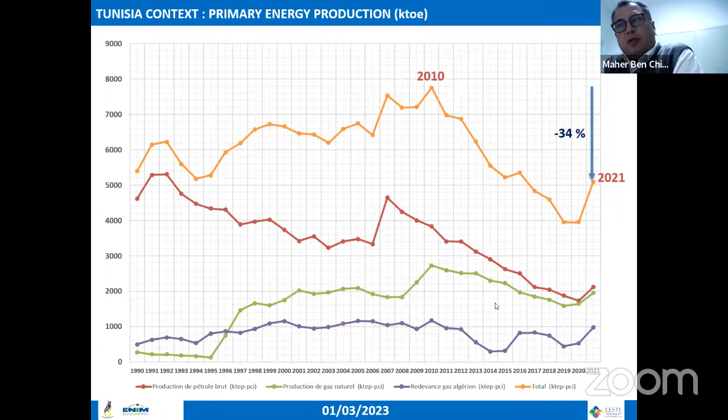So let's start with this Tunisian context. This first chart gives an idea about the primary energy resources in the last 3 decades. One can observe that oil production has been going down since 2010, and the domestic production of natural gas in green plot has stagnated. I have to mention here that Tunisia receives royalties on the gas that is pumped through a pipeline running through Tunisia, connecting Algeria gas fields to Italy.

According to the National Energy Observatory, the total final energy consumption reached in 2021 is about 9,700 kiloton oil equivalent. Oil products accounted for around 53%, followed by natural gas at about 18%.

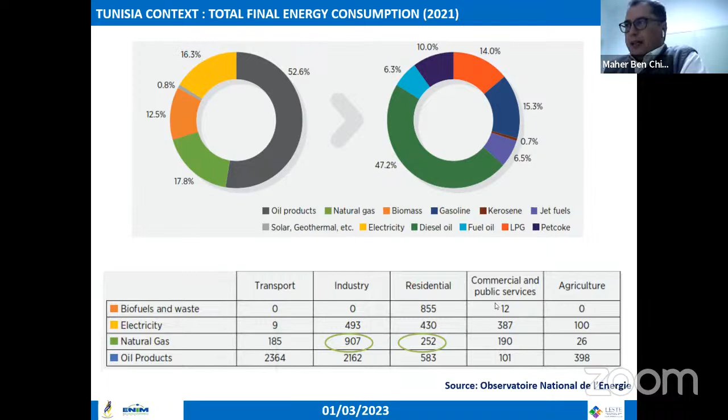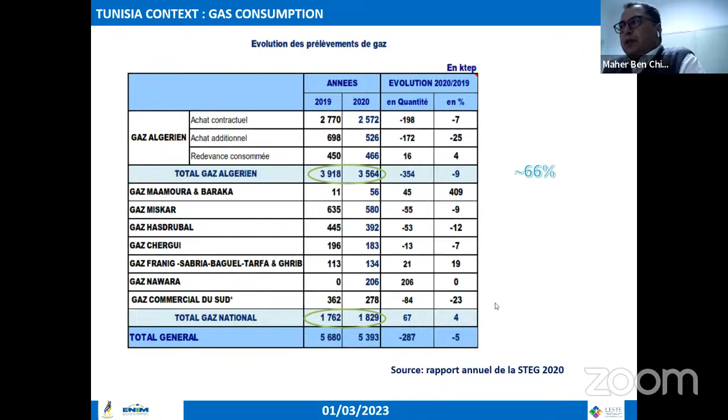Natural gas is consumed in Tunisia mainly in industry and the residential sector, and this gas is essentially imported from Algeria with a percentage of 66%. This share represents a great handicap for the national energy balance, despite the recent entry into service of many other national fields, such as Nawara gas field. So the Algerian gas is mainly distributed in the north of Tunisia, and it is mixed with national gas and distributed in the south.

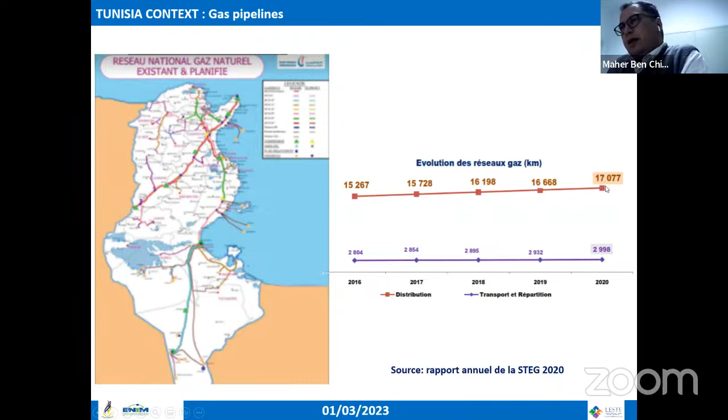The country of Tunisia has a large distribution network that covers most large cities and industrial areas. STEG reports of 2020 indicate that the network infrastructure continues to grow, and the transport and distribution gas grid size reached 3,000 kilometers and 17,000 kilometers respectively.

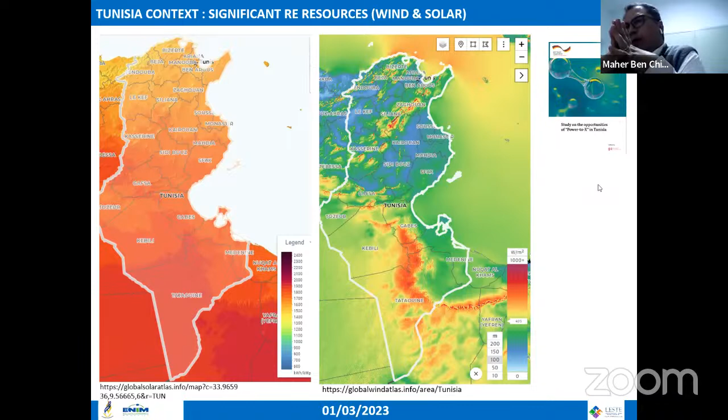On the other hand, Tunisia may account on its huge renewable resource in photovoltaic and wind resources. When we look to this map, we can appreciate the treasure that is available in Tunisia. When we evaluate this potential, we can see that Tunisia has a potential that is greater than the mean value in the world for both solar and wind potential.

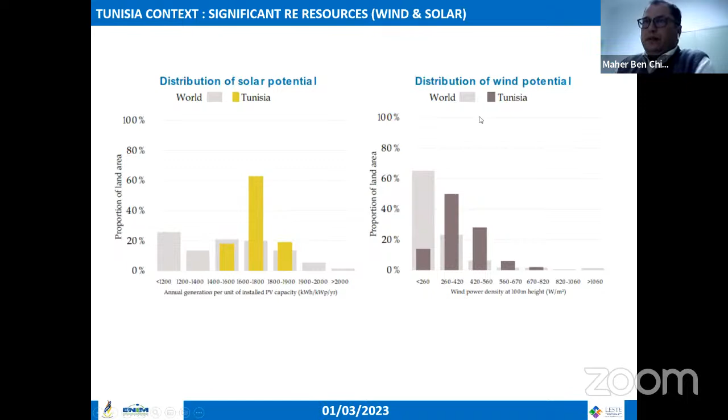Recently, Tunisia has set ambitious renewable energy targets in its solar plan. This solar plan expects a share of 35% by 2030. And here we need further power flexibility measures to integrate these capacities. This can be done by converting electricity into hydrogen to increase the flexibility of the power system.

And also using this hydrogen, or injecting this hydrogen in natural gas pipes, this can address many problems such as the large-scale application and transmission problems associated with using hydrogen as an energy source. Using the grid, you can ensure transmission and distribution of hydrogen, and you can reduce the energy balance deficit of Tunisia.

So this offers many advantages. I can mention here the ability to transport a large amount of energy with very little loss, decoupling supply and demand, enhancing sector coupling, enhancing storage capacities, and offering the possibility of re-electrification. All this can ensure a successful and efficient energy transition of our country.

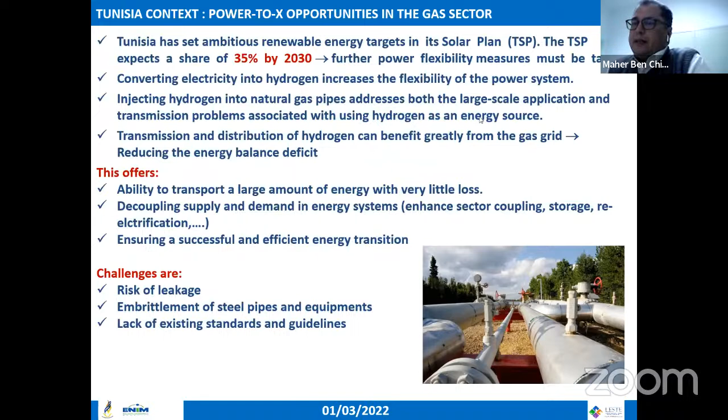For hydrogen blending requirements, I have to mention that hydrogen has the following characteristics: a significantly higher flame speed, less energy on a volumetric basis, greater flammability and explosive range, and hydrogen burns at a higher temperature than natural gas. So the addition of hydrogen can also affect the accuracy of metering, appliance material integrity, and the operation of appliance equipment.

An increased hydrogen concentration has the potential to result in undesirable combustion characteristics such as flashback, higher NOx emissions, the potential of uncontrolled reignition of unburned gas remote from the burner injector, and also the risk of hazards on appliance design.

So it is necessary to understand how adding hydrogen to natural gas might affect consumer appliances in order to determine if injecting hydrogen into distribution networks is feasible. We try to know how various pipe network types affect the variation in calorific value of natural gas after hydrogen mixing, and evaluate the proportion and quality requirements for hydrogen mixed gas in natural gas pipelines.

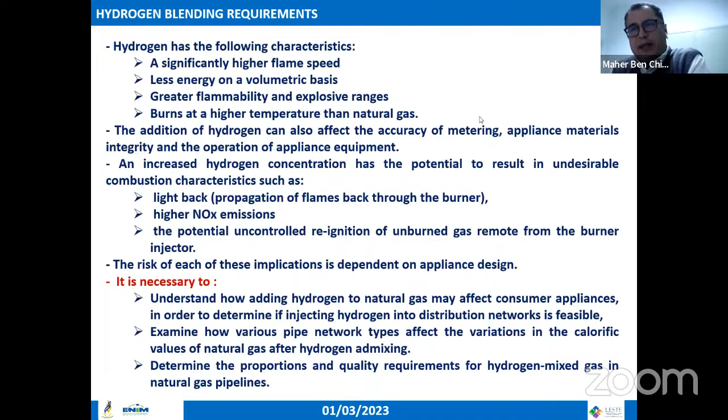When we speak about this, we need to define interchangeability. Interchangeability is the ability of a combustible gas to be replaced by another without requiring the adjustment of other gas devices or equipment, changing the mode of operation, or changing the setting of such equipment. The units will continue to function safely and effectively.

It is not new. The matters of interchangeability of combustible gases are not new. It was addressed by Knoy in 1941 and 1953, where he established the theory and practice of fuel consumption. It was addressed by Gilbert and Prigg in 1956 in his publication on the issue of transition from synthetic gases to natural gas, and recently by Jones when he discussed the mix of biogas, refinery gas, and liquefied natural gas with each other and air.

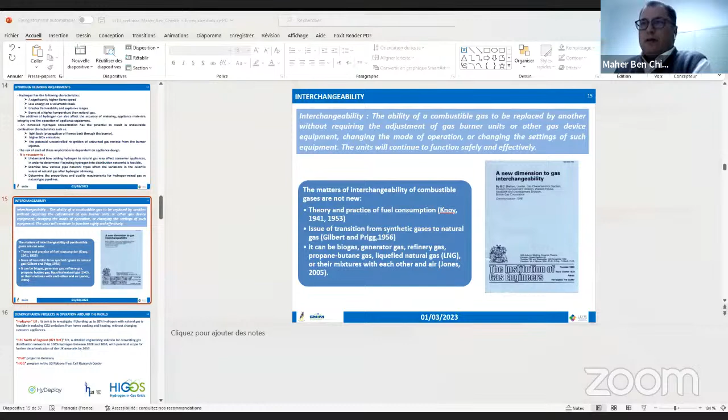Around the world, there are many demonstration projects in this direction. I can mention some of them: HyDeploy in United Kingdom, and others in United Kingdom, Germany, and the US.

To study the interchangeability, we have to look at the physical and chemical characteristics of natural gas. I'll mention some of them: maximum higher heating value, minimum and maximum Wobbe index, maximum inertness, maximum carbon dioxide, maximum nitrogen, maximum and minimum specific gravity, and maximum and minimum gas density. We also have to look at combustion parameters: methane number, flame speed factor, and the Sooting index.

The physical and chemical characteristics of natural gas provide a range of gas composition, ensuring connected appliances operate safely, and the combustion parameters are used to specify a particular gas composition. When we look at previous studies, we can identify that adding hydrogen to natural gas will alter gas composition, which in turn impacts the mentioned physical and combustion parameters.

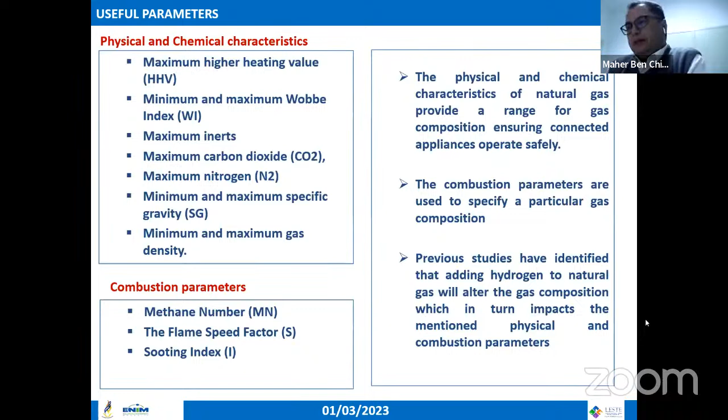Two main parameters have to be discussed here. The first is the higher heating value. It represents the energy content in a volume of gas when completely burned in air at standard conditions. It's key to the commercial valuation of natural gas as it refers to the energy value of the gas. A higher flow rate would be needed to achieve the same energy throughput with a lower higher-heating-value gas composition.

The effectiveness of gas appliances like burners and cookers is impacted by low higher heating value and low gas density. The second main parameter is the Wobbe index. It measures the heat rate at the burner. This parameter is used to estimate the interchangeability of various gases, but it's still a global indicator. The performance of a burner should be the same for different gases with the same Wobbe index.

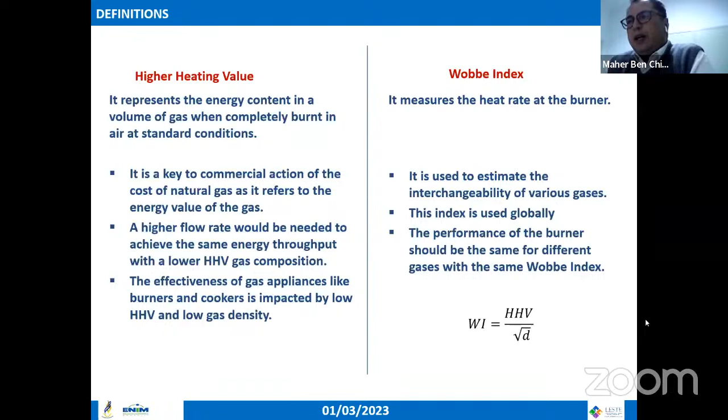The Wobbe index is linked to the higher heating value by this relation: Wobbe index equals higher heating value divided by the square root of mean gas density.

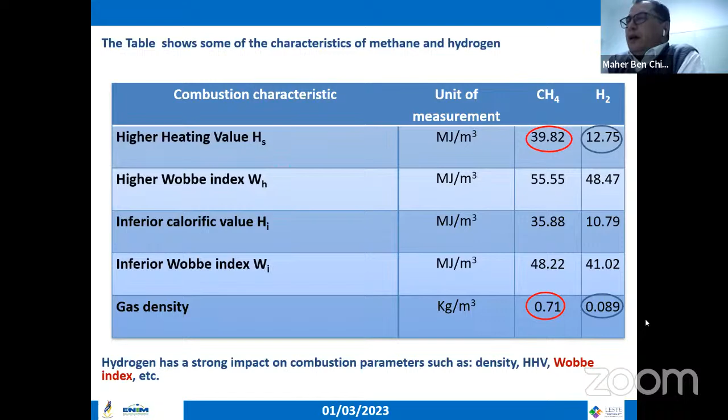This table shows some characteristics of methane and hydrogen, and hydrogen in natural gas, which has a high percentage of methane. We can see that hydrogen has a strong impact on combustion parameters such as density, higher heating value, and Wobbe index, because these combustion characteristics of hydrogen are lower than those of methane.

For this study, we used a gas test. We used Algerian gas as the gas test. Here I give the mean composition of the natural gas from Algeria.

When we look at standards, we can classify natural gas by family, then by group, then by subgroup. Natural gas are in family 2. Methane gases are in group E. The same group has the same combustion characteristics and are clustered by the value of one of the interchangeability indicators: the Wobbe index, the superior calorific value or higher heating value, and the combustion potential.

Here we plot higher heating value versus different ratios of injected hydrogen in natural gas. We can see the higher heating value decreases linearly versus hydrogen injected. But when we look at the Wobbe index, we see it decreases until 80%.

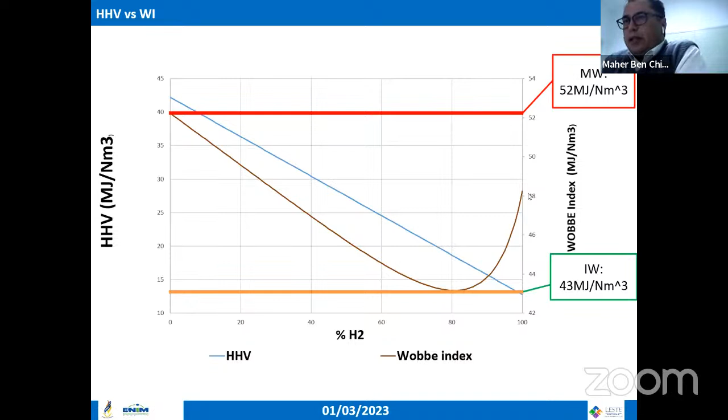It seems as if you're, at least I am, quiet here. I don't know about my colleagues. Cannot hear you anymore. We lost him. Can you hear them, Alex? No, I can't. We cannot hear you, Professor Benchik. You're quiet.

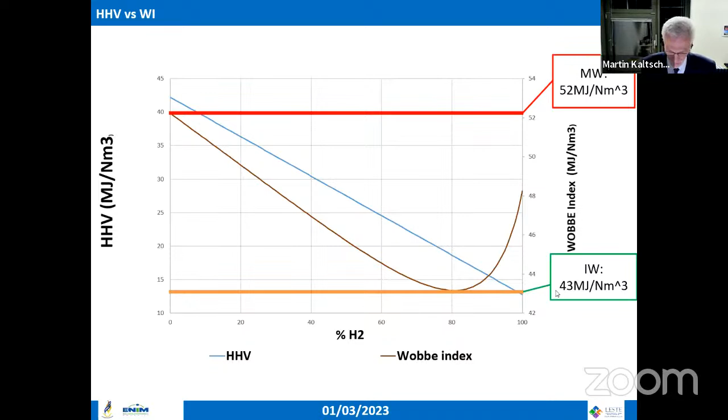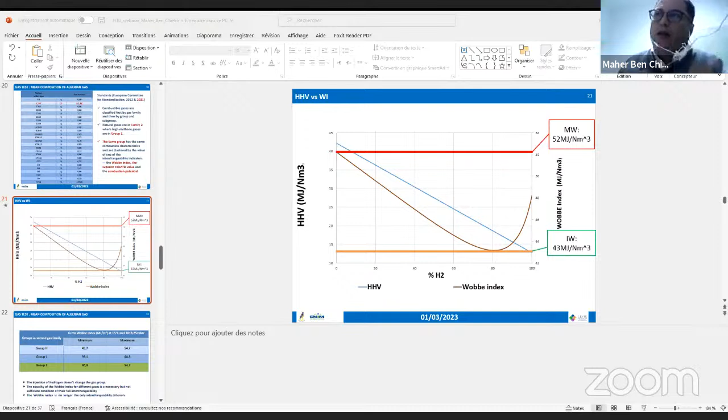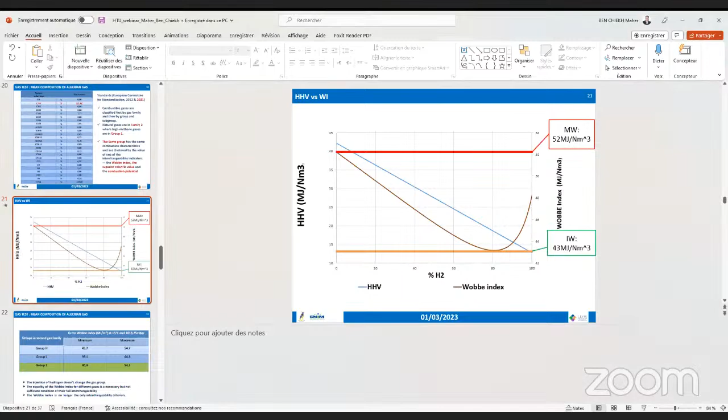Is it okay for me now? Yes, thank you. I have to switch this camera. Okay. Is it okay for this slide? Do you hear me in this? We can hear you, the slide is fine, but we don't have your video. You're black, so to say. Ah, okay.

So in this slide, I said that we will use in this study the mean composition of Algerian gas as a gas test. This Algerian gas is characterized by a high percentage of methane.

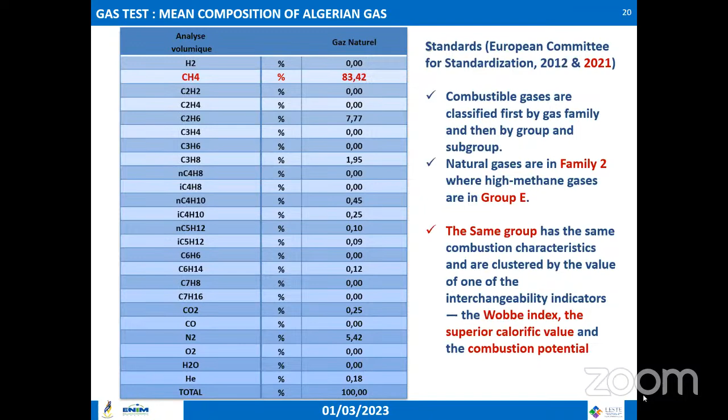When we look at standards, combustible gases are classified first by gas family, then by group and subgroup. Natural gas are in family 2, where high methane gases are in group E. The same group has the same combustion characteristic and are clustered by the value of one of the interchangeability indicators: the Wobbe index, the superior calorific value or higher heating value, and the combustion potential.

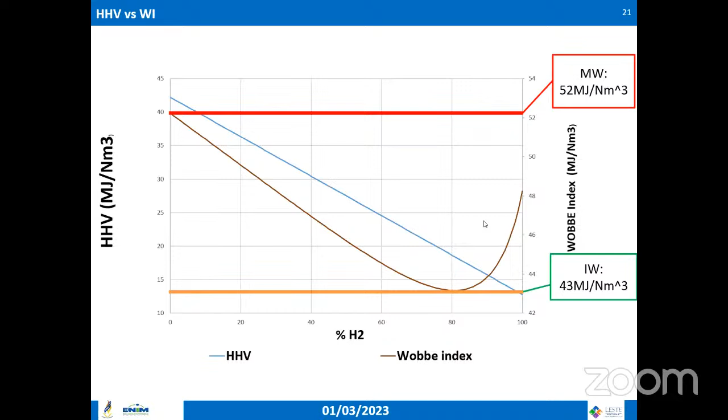When we plot the higher heating value versus hydrogen percentage, one can observe that this higher heating value decreases linearly versus hydrogen percentage, and the Wobbe index decreases until 80% before climbing back again. The main result here is that the Wobbe index varies between 43 and 52 megajoules per normal cubic meter, and it's still inside the range allowed by group E, reserved for high methane gas. The injection of hydrogen here doesn't change the gas group.

We have to mention here that equality of Wobbe index for different gases is necessary, but not sufficient, for their full interchangeability. The Wobbe index is no longer the only interchangeability criterion.

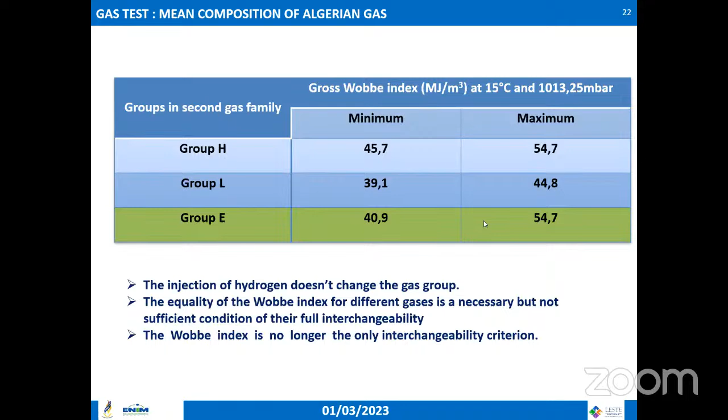To improve the viability of the study, we must consider the combustion parameters.

When we look at the combustion diagram here, starting with this green point, the injection of hydrogen reduces the heat output, and the final operating point may remain in region 5, dedicated to steady and efficient gas combustion, or move into region 1, called the light-back region, or move to region 3, the yellow-tipping region, which is a soot region.

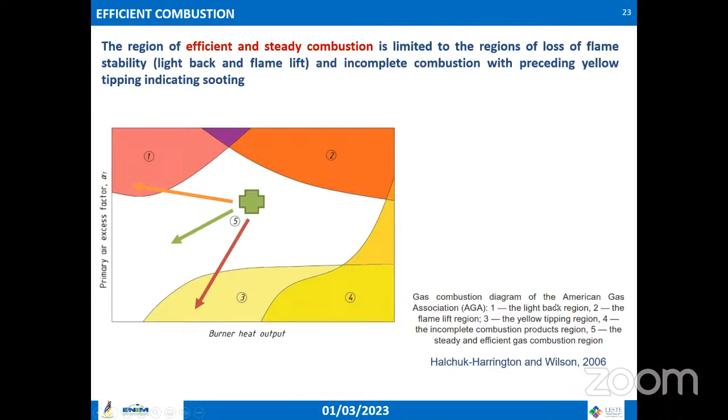To perform a deep study of the impact of hydrogen on combustion parameters, we can use one of these advanced methods.

In this work, we tested 3 methods: the one highlighted in red, the Dutton criteria, the Delbourg method, and the Knoy factor. In each method, specific parameters are evaluated. Let's start with the Dutton approach.

This approach consists of simplifying the gas composition by converting it to an equivalent mixture of methane, propane, nitrogen, and hydrogen. All hydrocarbons are replaced with an equivalent amount of methane and propane, and nitrogen is adjusted to preserve the Wobbe index of the original gas mixture.

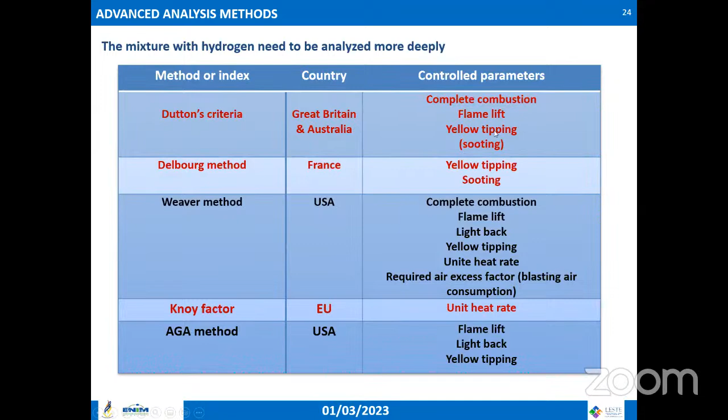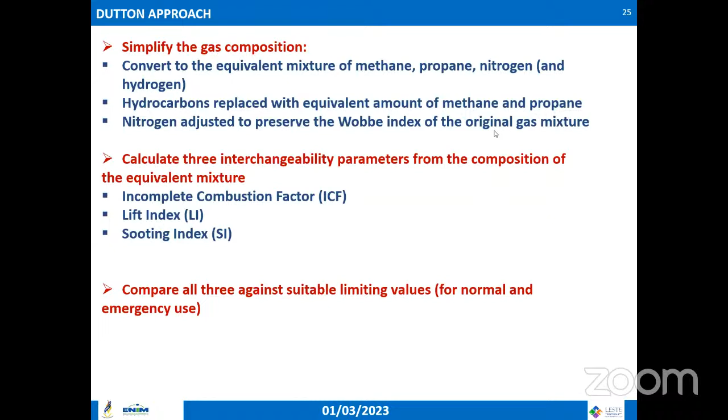The second step was to calculate 3 interchangeability parameters: the incomplete combustion indicator, the flame lift index, and the yellow-tipping or sooting index. The last step was to compare all these 3 parameters against suitable limiting values.

This method is used in the UK, and regulation in Great Britain stipulates that this indicator must be less than 0.48 to prevent incomplete gas combustion.

The second parameter is the lift index. It is an empirical parameter developed and used by Dutton to predict flame lift, when the characteristic flame velocity becomes lower than the characteristic flow velocity. This parameter is defined by this equation.

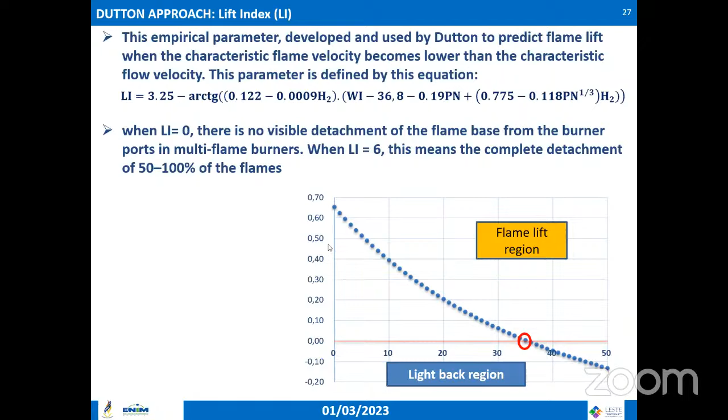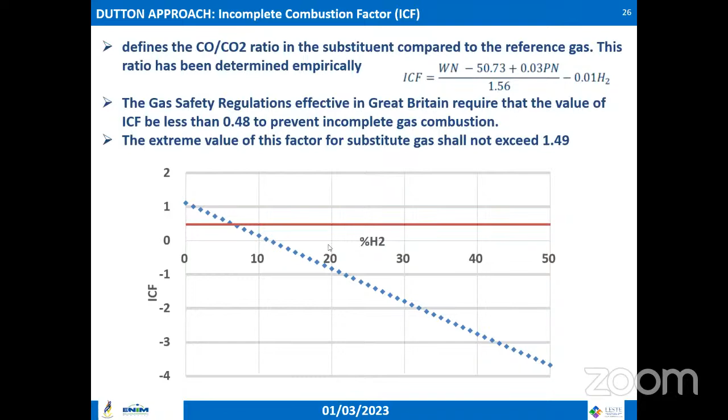So to summarize, we can see that only for the first parameter is there a slight limitation on hydrogen injection into natural gas.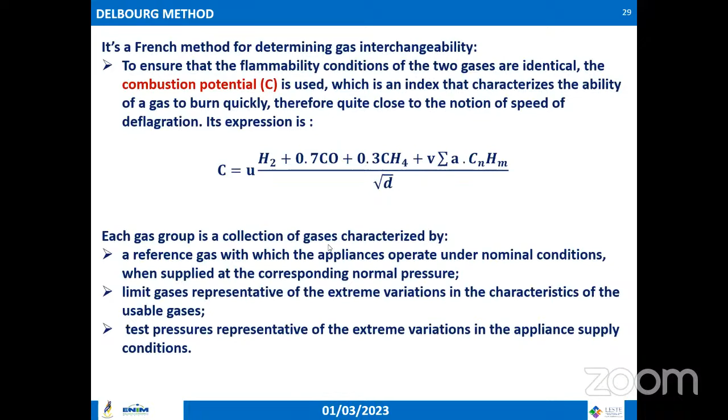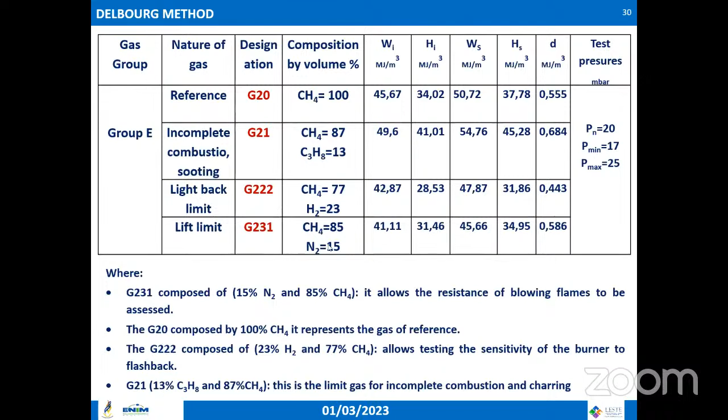This French method developed some reference gases, given in this table and designated G20, G21, G222, and G231. For these reference gases, there are specifications for each one, given below.

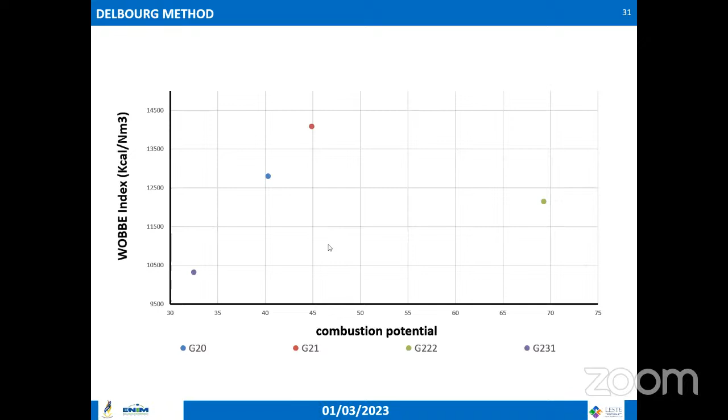When we plot these references on a Wobbe index versus combustion potential plot, we can delimit the region of this reference gas, and we integrate our results on this plot.

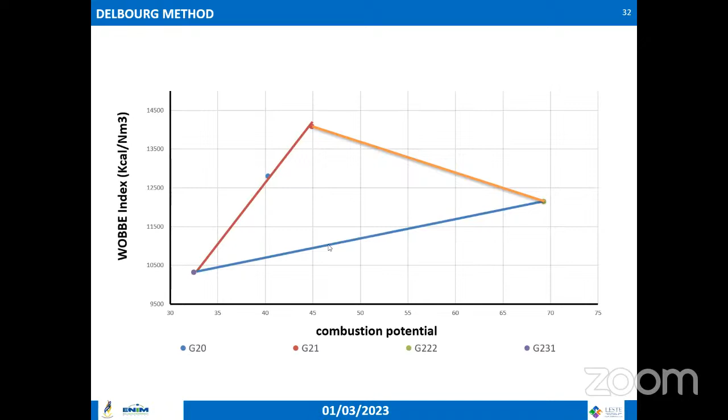We can see that when we add hydrogen to natural gas, we reach a limit of 20%, and after this limit we are outside the diagram limit. So the maximum rate allowed by this technique was 20%, to remain inside the interchangeability diagram.

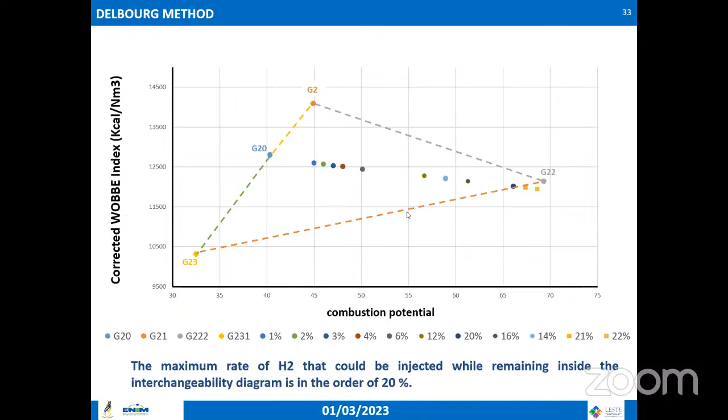The third method tested here is the Knoy factor, given by this relation. When we plot this factor versus hydrogen injected into natural gas, we can see that within a variation of less than 5% tolerated by this method, we can inject up to 20% hydrogen.

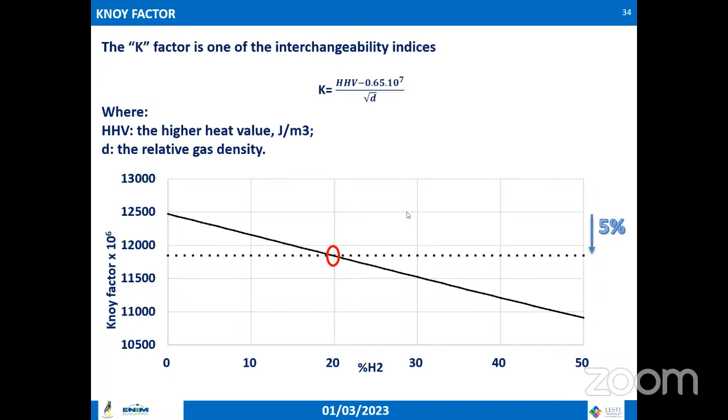So according to this study, natural gas and natural gas enriched with hydrogen are interchangeable for well-defined proportions. A hydrogen content up to 20% is possible using the two last methods, method 2 and method 3. A deeper analysis considering the economic impact of this large-scale alternative must be performed.

Also, studies on other national gas fields, Miskar and Nawara, are in progress. I have to mention that the gas sector in Tunisia is governed by two main laws dated 1999 and 1964, and the production of hydrogen as an energy product is not covered by any existing provision under gas legislation. For any future development of green hydrogen activity, new regulation would have to be developed.

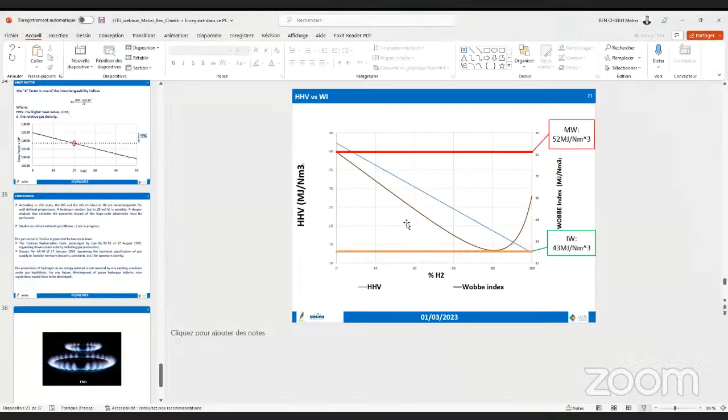Yeah, Professor Ben Cheikh, thank you very much for this very nice presentation. Sorry, well, you know, things happen, but then we figured out that the battery of your headphone had expired, so from that point on it worked out quite nicely.

Thank you very much for this very interesting presentation about the interchangeability of hydrogen injection in gas pipelines. This is also a topic which is very much discussed here in Germany. Some of the local gas providers or gas transportation companies claim that they can use 100% hydrogen, so they claim to already be hydrogen-ready for transportation.

Others say, well, we can only use 10%, 20% or something like this. So this is a very ongoing discussion here in Germany at the moment. Most likely we will also get some problems with the end user, because as you outlined, if the end user gets a different gas quality and has a sensitive end-use facility or end-use apparatus or system, that might also create a challenge.

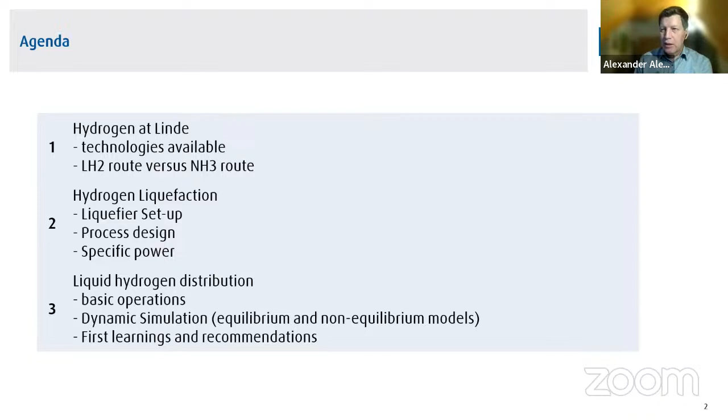That's about Linde. Linde is a large industrial gas company, really great, 80,000 employees representing 100 countries. Linde is a member of the Dow Jones Sustainability Index, and we're proud of it. But I think more interesting is our hydrogen footprint, and the most important information: we are one of the biggest producers of hydrogen. We own and operate 150 plus hydrogen plants, producing more than 8,000 tons per day of hydrogen.

That is unfortunately mainly gray or black hydrogen, but we are now going to be greener and greener. We have already installed roughly 80 electrolyzers with a total capacity of 40 megawatts. This number is from 2021, I think. In 2022 we doubled our capacity, and I think in the next years we will even increase the production of green hydrogen.

What's interesting, we have a huge hydrogen pipeline network. The total length is more than 1,000 kilometers, mainly in the USA, in the Gulf Coast. But in Germany, in Leuna, close to Leipzig, we created a huge hydrogen pipeline network with compressor stations, and we have one cavern in the USA, one of the biggest hydrogen caverns for storing, mainly for backup purposes in the USA.

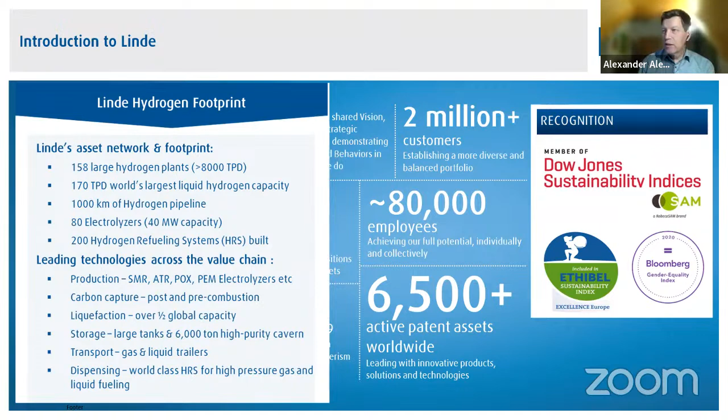Good. The next slide, in principle, is the same, therefore we can skip it.

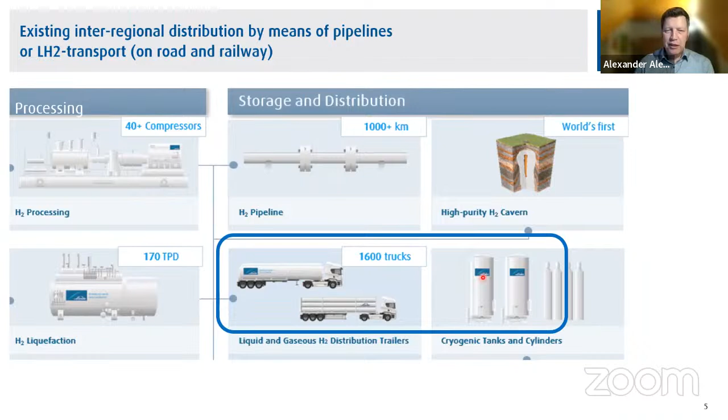The next part is a bit more information about the two technologies for transportation of hydrogen now. That's mainly by pipelines, as I said, in the upper part, and we use the pipelines and then caverns for the liquid. There are liquefiers shown, some trucks, cryogenic tanks and cylinders, and the numbers. What's interesting here is that Linde Engineering has a very interesting site. If you are interested in more information about hydrogen, you can go to this link.

One interesting technology, related to the presentation before made by my colleagues, is Linde's technology to control the hydrogen extraction from hydrogen-blended natural gas. If you inject the hydrogen into the natural gas, it's possible to remove the hydrogen from this mixture from natural gas. We use a special membrane technology based on so-called HISELECT membranes. This link is where you can find more information for this special technology. I think that's interesting because it's linked to pipeline transport.

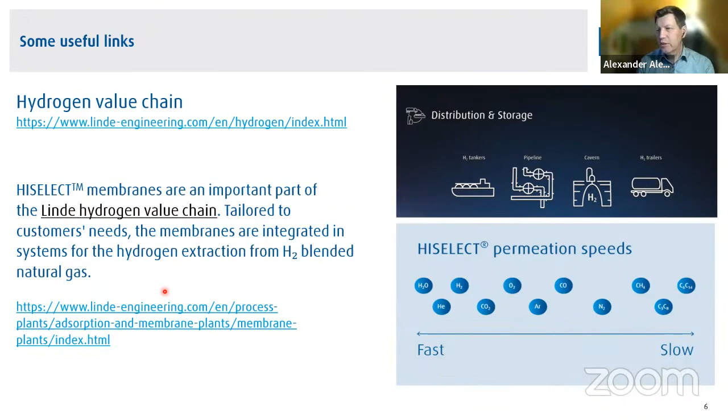What's interesting is that Linde has, of course, the whole complete liquid hydrogen supply chain, but we are also very familiar with ammonia, as Linde owns proprietary ammonia production technology. If you need ammonia, if you need a really mega-size plant, you usually go to Kellogg Brown & Root, to ThyssenKrupp, or to Haldor Topsoe.

But if you need a medium-sized plant, it's still huge, but not so mega scale. In this case Linde provides ammonia technology, and our customers like Yara are very happy. This technology is interesting - they use not air directly but nitrogen for synthesis. They use an air separation plant to separate air into nitrogen and oxygen, and only nitrogen goes into synthesis. That looks more like the future green ammonia production plant, based on a reactor using nitrogen and hydrogen. We are very familiar with this technology.

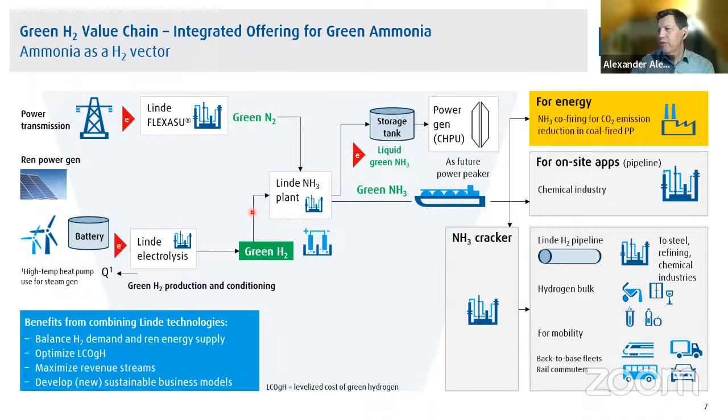Now the slide is about interesting discussions happening worldwide on how to transport hydrogen from one side to the other, and discussions are focused on two kinds of technology. One technology is based on liquid hydrogen. You produce the hydrogen, green or blue, you liquefy it, store it on the export terminal site, then load the ships, ships go to the import terminal. At the import terminal, you can vaporize the hydrogen and put it into the pipeline grid, or you can use the liquid for further distribution. That's one sort of chain.

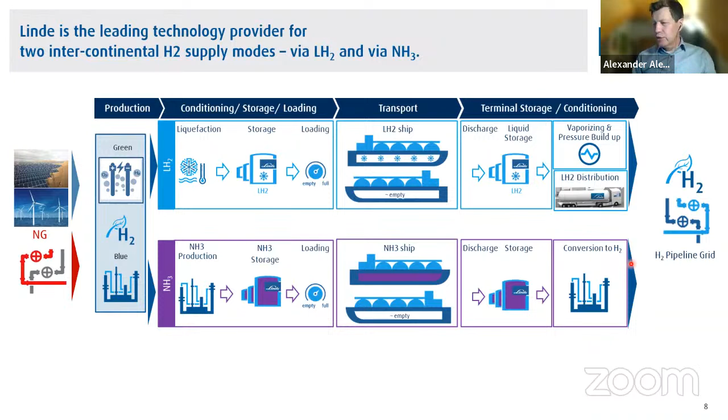The second route, now under discussion, is for ammonia production. You use green or blue hydrogen for ammonia production, and you move the ammonia by ships. At the import terminal, you need to convert the ammonia back to hydrogen and put it into the pipeline grid. There are a lot of studies comparing these technologies, and we performed one internal study, because we are familiar with both technologies, the ammonia and the liquid hydrogen routes. I'm not really willing to share all results, but one result is more about Tunisia.

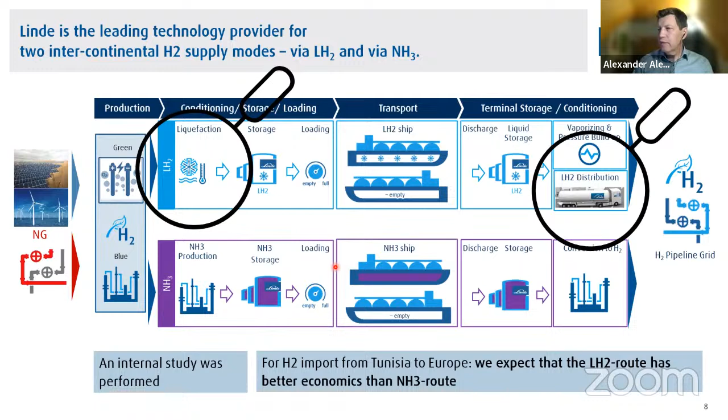For Tunisia, our study says that the liquid hydrogen route has better economics than the ammonia route. That's mainly because the distance is relatively short, and for ship transport they don't need so much fuel or hydrogen, and the boil-off gas losses are really low. Therefore, in our calculation, LH2 transport is better when we are talking about Tunisia. Good, that was the output of the study.

Now I go to the hydrogen liquefaction. With some slides I presented already last year, therefore I will try to go a bit faster.

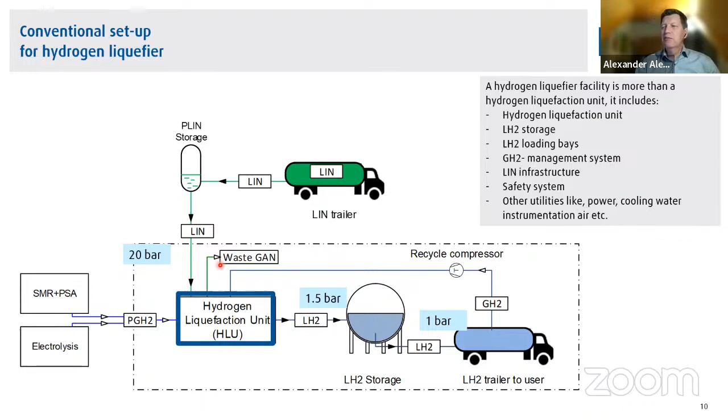What's special here? You need really cold temperatures - 20 Kelvin, which is minus 250 degrees Celsius. The critical state is at 13 bar. That's an important value because for liquefaction you need supercritical hydrogen - you need to compress hydrogen before liquefaction, over the critical pressure, and critical is 13. It means for liquefaction you need 15 or 20, better 25 or 30.

Evaporation heat is very low, like 1 kilojoule per mole. What's special in hydrogen is that during the cooling it goes through a kind of conversion - from a normal composition, ortho, to para. During this conversion, some additional heat is generated, in the same order of magnitude as evaporation heat, about 1 kilojoule per mole. That's additional heat you need to remove during the liquefaction mode - you cool it, and you need to convert it, and that value is considerably high, comparable with evaporation heat. Density in liquid condition is just 70 grams per liter - it's a very light liquid.

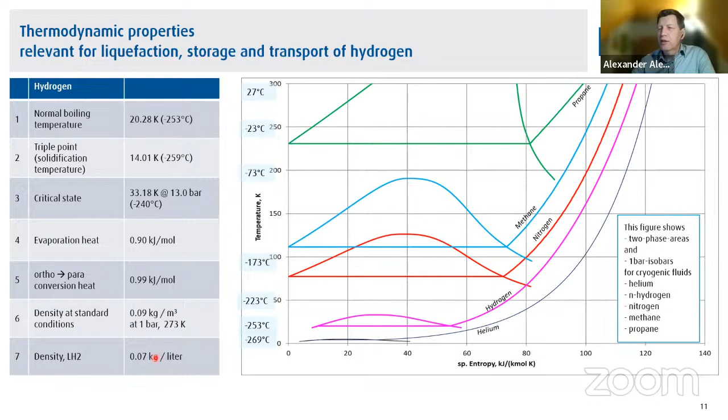Good, there are some slides explaining this ortho-para conversion, but I will skip it.

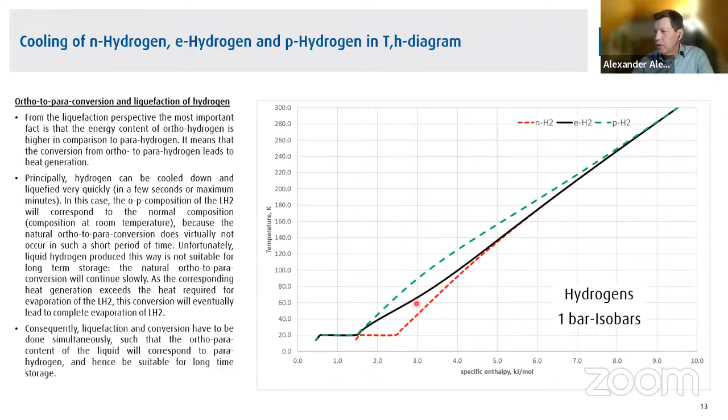That's an interesting slide, the temperature-enthalpy diagram. It shows the difference: if you take hydrogen, normal hydrogen, that's the red line, and cool it from ambient temperature, you'll liquefy it along that red line. But in reality, you need this conversion from ortho to para. The real line is like the black one, and you need really 1 kilojoule more of heat to remove. That's interesting.

The minimum liquefaction power required for liquefying hydrogen in a reversible process is really like 3.9 kilowatt hours per kilogram. That's 10 times more in comparison to LNG, liquid natural gas, which is 0.3, versus 3.9 here.

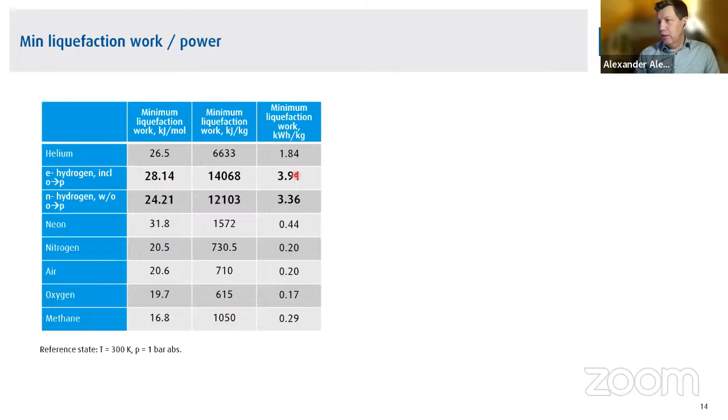The good message is that this liquefaction power depends on the pressure. The value of 3.9 is given for pressureless hydrogen at ambient pressure. But the good news is that all conventional hydrogen manufacturing technology, for example steam methane reformer, produces hydrogen at elevated pressure, roughly 20 bar. And the minimum liquefaction power required for this elevated pressure feed is lower - it's adjusted to 2.87 at 20 bar, about 2.8 - that's 25% less than otherwise required.

I said that's the minimum liquefaction power required in a reversible process. In a real process, you have losses - the process is not reversible, and typical efficiency is like 30-35%. At the end, it results in a real liquefaction power of 10 or 12 kilowatt hours per kilogram.

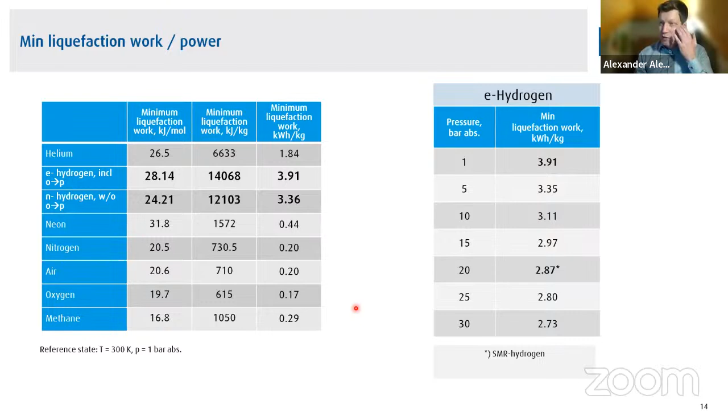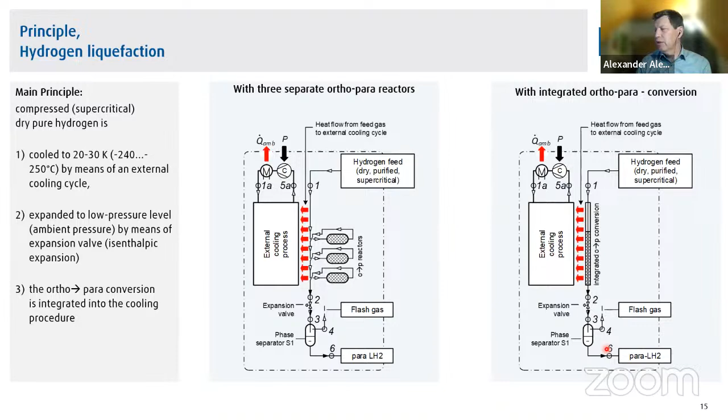You need this ortho-para conversion tool, via some catalyst filled in the heat exchanger. You cool and convert, and achieve a temperature of roughly 30 or 25 Kelvin, and you expand this hydrogen. After isenthalpic expansion, the feed is liquefied. Then you have your para hydrogen. That's in principle very simple. In detail, if you look at the process, it's maybe more complicated, but the basic principle is very simple: just cool, convert, then expand. That's all.

This cooling process, normally in all liquefiers, is done as a two-step cooling approach. Usually you cool first to the liquid nitrogen temperature level at 80 Kelvin, then in the second step go to the temperature level of 20-25 Kelvin. Why? Because the liquid nitrogen temperature level is relatively simply achievable. Liquid nitrogen uses conventional cooling technology, it's like a commodity, well understandable, and not a problem at all to achieve 80 Kelvin using standardized conventional cooling technology.

The challenging part is really to go from 80 to 20 Kelvin. That's like if you go to Mount Everest: you go from level 0 to, say, 4,000 or 5,000 meters - every person can go to this level, that's like going from 300 to 80. But the last part, going from 4,000 to 8,000, that is really difficult. That's like going to base camp, and then from base camp to the summit - that's really difficult.

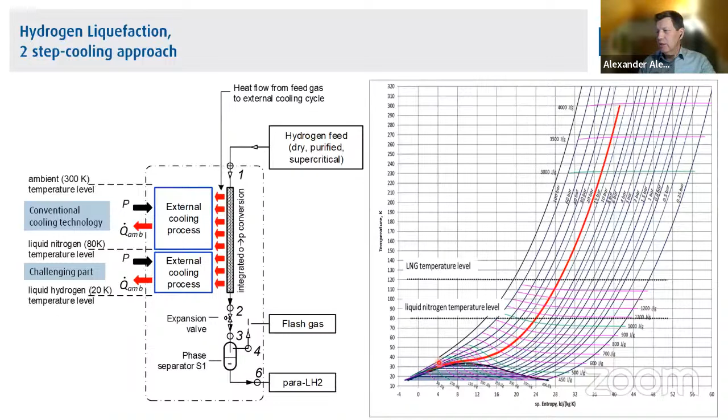In the temperature-entropy diagram, the process shown: you take 20 bar hydrogen, you cool it and cool it, you achieve the liquid nitrogen temperature - that's the base camp - and then you go further to 20-30 Kelvin, then expand the liquid hydrogen, and then it's liquid. The next picture shows the same diagram, just the lower part below 120 Kelvin - you go from 80 Kelvin to 30 and then expand. That's all.

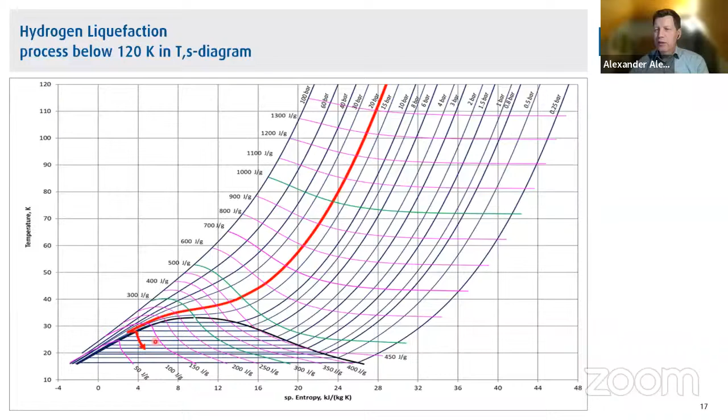This is again a zoom of the lowest part. If you pre-cool the hydrogen to a temperature of 36 Kelvin and expand, roughly half of this hydrogen feed is liquefied. That's not good because you cooled it and only half is converted into liquid. It's better to cool it to 30 Kelvin - if expanded, roughly 75% is liquefied. But the best idea is to cool it as cold as possible, to 22-23 Kelvin, and then expand your hydrogen - then it's liquefied almost completely.

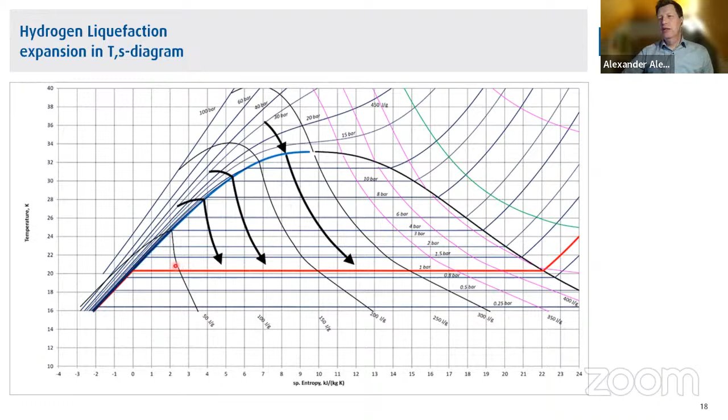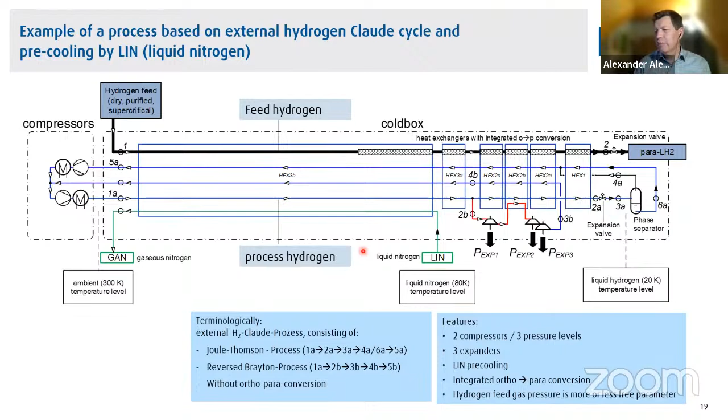What's new is that the conventional technology uses liquid nitrogen from an external source for external cooling in the first stage. That's okay for today's liquefiers, which have a capacity of less than 40 or 50 tons per day, requiring less than 20 megawatts. The amount of liquid nitrogen required is not so much, in terms of moles it's comparable with the hydrogen feed, in terms of norm cubic meters. But in terms of mass, it's a factor of 14 higher, because nitrogen has a molecular weight of 28 and hydrogen just 2.

But in the future, if larger hydrogen liquefiers are built, I think all companies now claim they will be able to deliver 50, 100, 200, or 300 tons per day. In this case, the amount of liquid nitrogen needed is a bit higher, and probably the existing liquid nitrogen infrastructure is not able to deliver this amount. We need to implement a kind of special nitrogen cycle.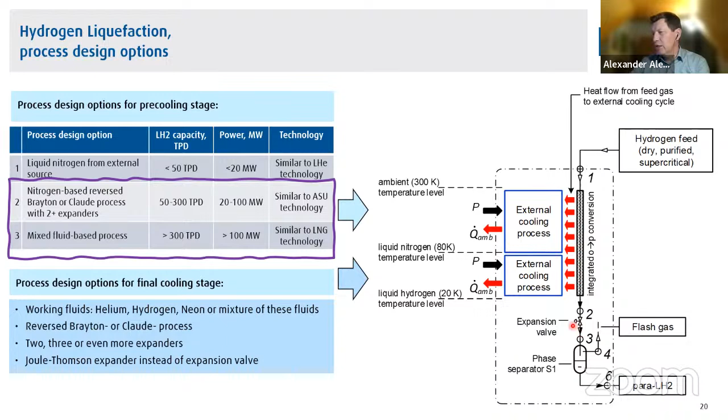For the final cooling stage, processes based on the Brayton-Claude processes will still be the preferred processes. There are some options available for what working fluid we can use: helium, hydrogen, neon, or mixtures of these fluids. The number of expanders needs to be optimized, 2, 3, or even more. An interesting option that I think people are considering is using a Joule-Thomson expander here instead of the expansion valve. If the hydrogen amount becomes higher, it makes sense to introduce the expander.

This is probably not a new slide - I think Linde has communicated it very often. This slide on the left was published in 2011 about the energy specific power demand for liquefaction of hydrogen. In 2011, we already had a system in Leuna with about 10 kilowatt hours per kilogram, and the expectation was that we could achieve 7.4 or 6.4 if we scaled up our system. But compared with the real development, these numbers were not achieved. It's not because they weren't achievable, but the market demand was not for that.

The market expectation was different - the demand was not for a very efficient system but more for a low cost system, and development was focused on reducing cost, not specific power. If you look at the corrected approach, as expected today, the value of 10 or 9 kilowatt hours is already achieved. That's no problem. The expectation is we can go to 8 or 7 kilowatt hours per kilogram in the near future.

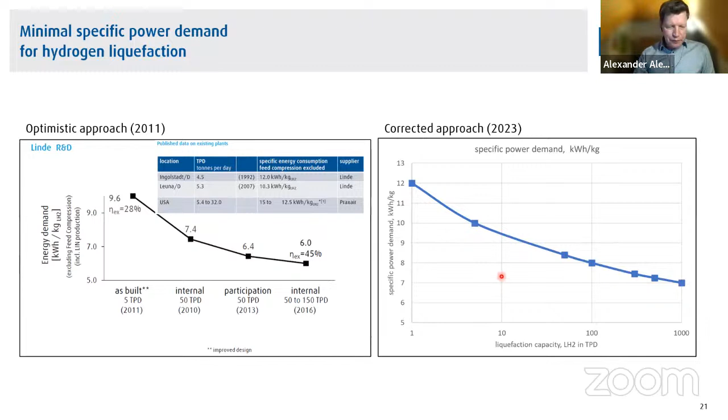If you look at the specific capex, there's a well-known effect, economy of scale. If you double the capacity, the specific cost is reduced by roughly 33%. That works for hydrogen liquefaction too. The one problem is that this economy of scale works well for heat exchangers and expanders, which are really scalable devices, but compressors are still a challenging issue - we need high capacity compressors for hydrogen, and that's still a problem.

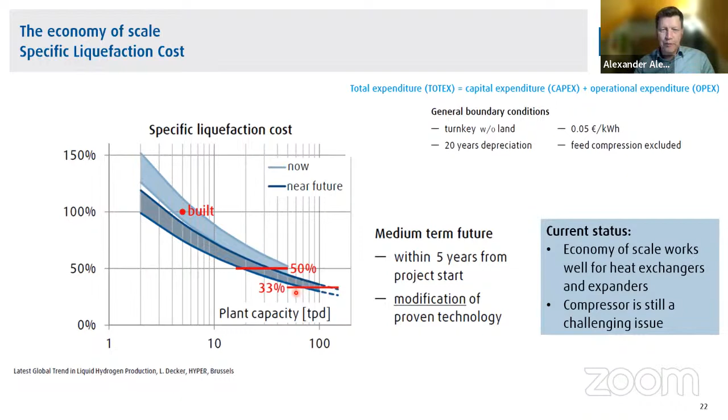Good. The idea was to go to liquid hydrogen distribution on the next slide, but I'm now out of time.

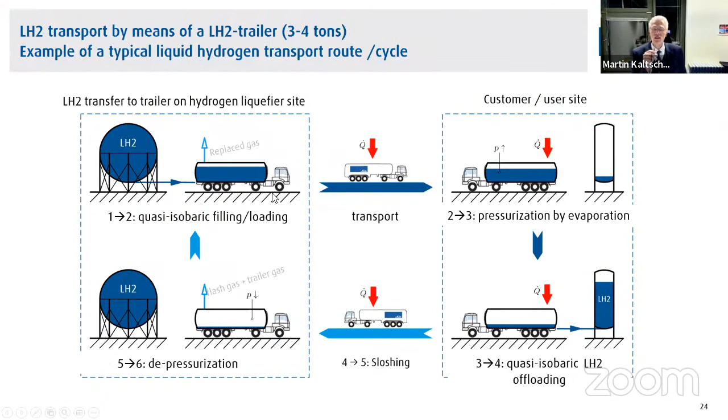Thank you very much. So we are close to an end, and now the question is: how do you see it in the years to come when it comes to hydrogen transportation? We have seen that, on one hand, Alex showed that we can transport hydrogen as a liquid on short distances, which is quite demanding from an energy point of view. And you, Maher, have shown that we also can transport it via pipelines, and there also as a feed-in gas to the existing natural gas.

So where do you see the borders of the different technologies? I guess we will not transport a mixture between natural gas and hydrogen. Maybe we do, I don't know, from Tunisia to Europe. And maybe it's not the very best solution to transport liquid hydrogen just around the corner to regasify it. So where do you see the borders or the most promising application areas for the different technologies? Maybe we start with you, Alex, on the liquid areas, and then you, Maher, on the markets for pipeline transport and maybe combined transportation with natural gas.